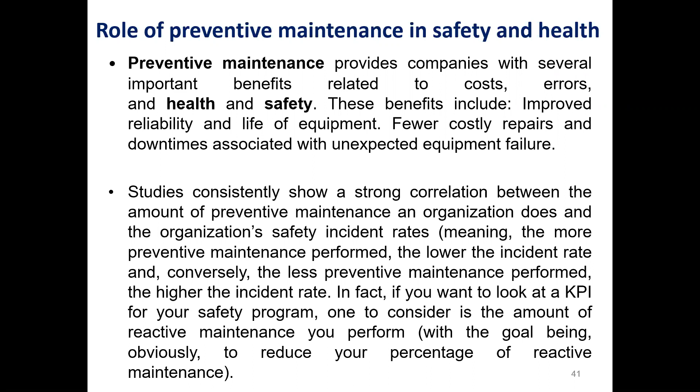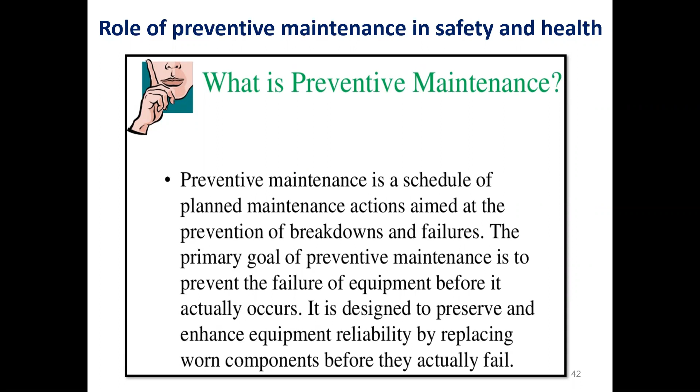What is preventive maintenance? We have already discussed all these things. What exactly the preventive maintenance is - to avoid the breakdown and failures. What the maintenance is that called is preventive maintenance. It is designed to preserve and enhance the equipment reliability by replacing worn components before they actually fail. So we have to observe these worn components and then we have to replace it.

These are the different parameters which are related to the preventive maintenance, that enhances the safety level. Then liability is more - the responsibility of the preventive maintenance or the central maintenance are there, and they have to observe all these components or the parts of that machinery. It is a reliable process because due to which we are going to avoid the major breakdown maintenances, and longevity. So these are the different parameters which are related to the preventive maintenance.

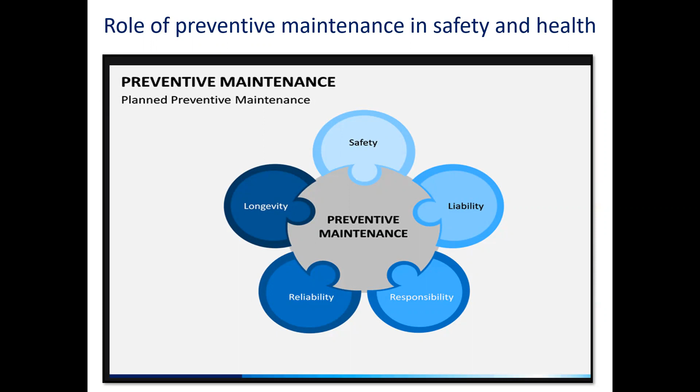So we have to plan the preventive maintenance in a smarter way. The types of maintenance are preventive and corrective - we have already discussed about this. With preventive maintenance, we can save our time. We can find the failure components, and these are condition based and prediction based, and they are going to reduce the risk. But in the corrective actions or corrective maintenance or breakdown maintenance, they are deferred, and this is nothing but the emergency situation.

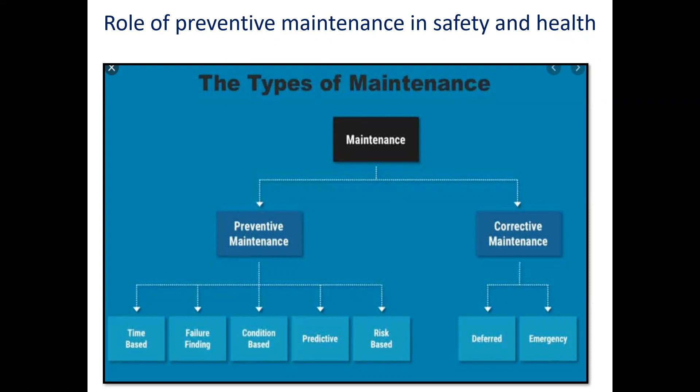Role of this preventive maintenance in safety and health. The reasons for the need of PM are increased automation, business loss due to production delays, production of higher quality product, just-in-time manufacturing, and need for a more organized and planned environment.

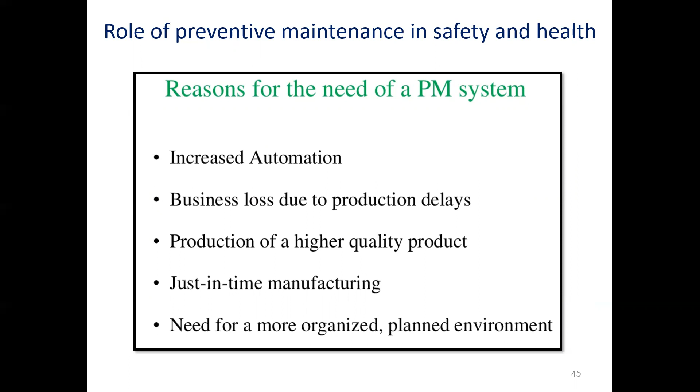So advantages, we already discussed these advantages. Just go through this: reduce production downtime resulting in fewer machine breakdowns, better conservation of assets, timely routine repairs circumvent fewer large scale repairs. If failure can't be prevented, periodic inspection should be held, to reduce the severity and cost of repairs, and identification of equipment with excessive maintenance cost. The cost of planned maintenance is always cheaper than emergency maintenance. It gives better quality product and improved safety and quality conditions.

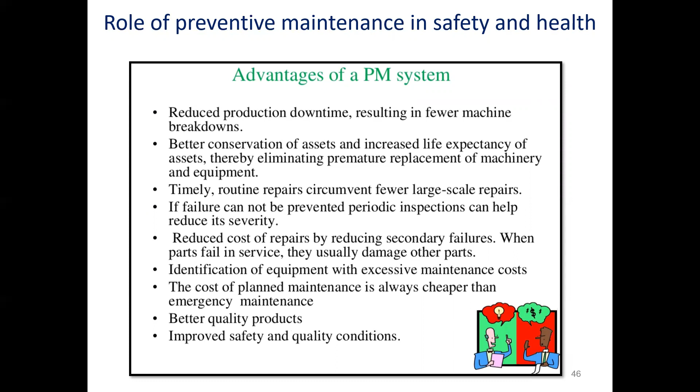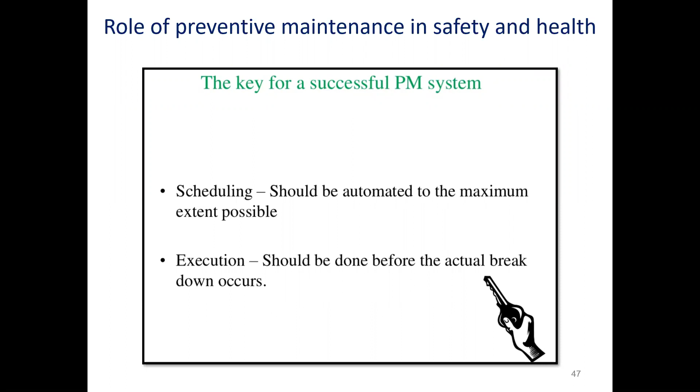The key of a successful PM system is scheduling and execution. Scheduling should be automated to the maximum extent possible, and execution should be done before the actual breakdown occurs. Because if it is done before the actual breakdown, only then is it called preventive maintenance. Otherwise, it becomes breakdown maintenance after failure.

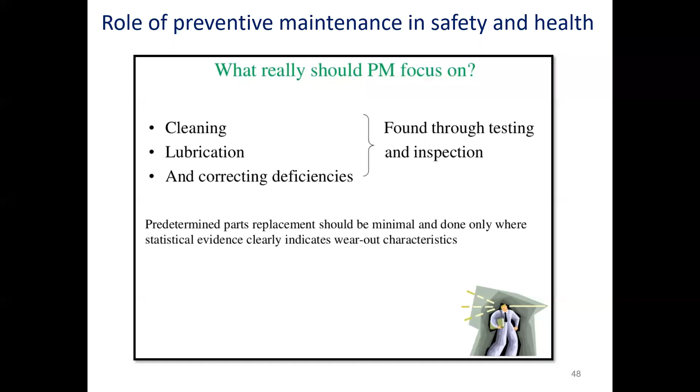So why are we focusing on all these things related to PM? That is for cleaning, production, lubrication, and correcting deficiencies. All these things are found through testing and inspection, then predetermined parts replacement should be minimal and done only where statistical evidence clearly indicates wear out characteristics.

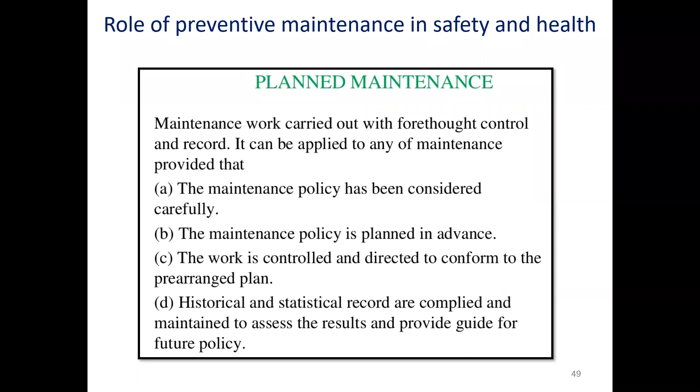So we have to plan this preventive maintenance in a better way, so the maintenance policy should be considered carefully and planned in advance. That should be work in control and directed to conform to the prearranged plan. Historical and statistical records are compiled and maintained accordingly.

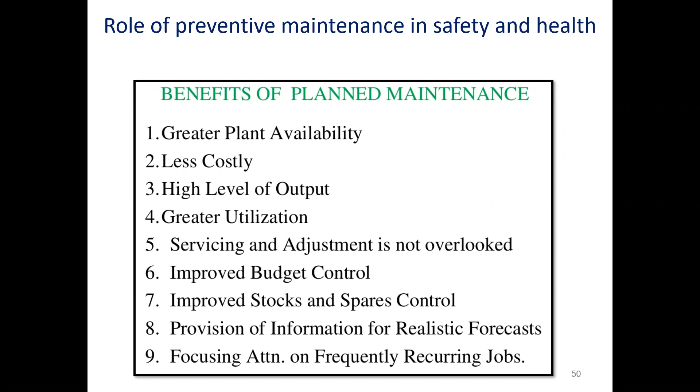So what are the benefits of planned maintenance? Greater plant availability, less costly, high level of output, greater utilization, servicing and adjustment not overlooked, improved budget control, improved stocks and spare control, provision of information for realistic forecast, and focusing attention on frequently recurring jobs. So these are the various benefits of planned maintenance.

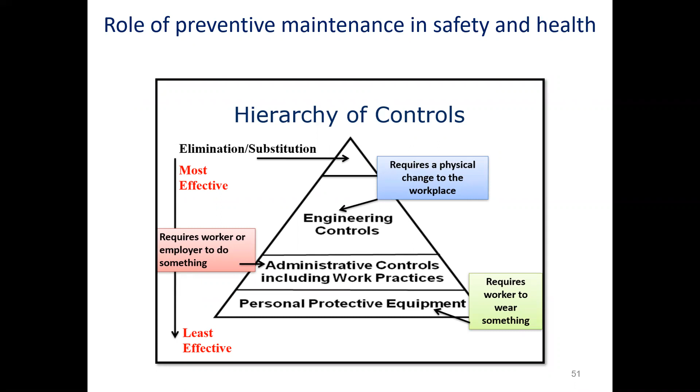This diagram shows you the hierarchy of control. Elimination or substitution gives the most effective process, then engineering control to reduce hazards, and administrative controls or personal protective equipment are the least effective. So we have to go for engineering control, and preventive maintenance is part of engineering control, which requires a physical change to the workplace. That is why we should prefer preventive maintenance over other types of maintenance.

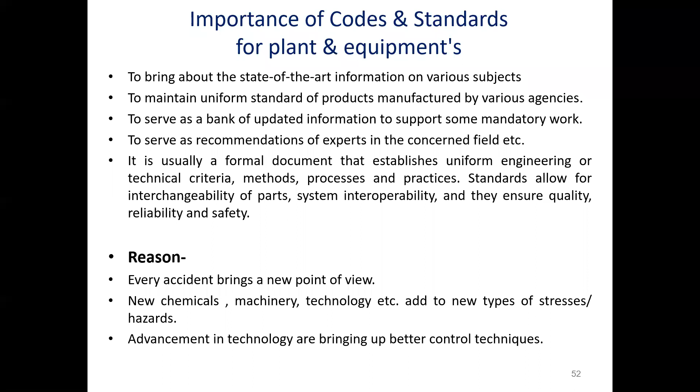The advancement in technology is bringing up better control techniques, but for that you have to go through the total or detailed training of this advanced technology.

Whatever standards are available, for example the Factory Act 1948 is a generalized act applicable for all industries in India. For the state of Maharashtra, you have to follow the Maharashtra Factory Rule 1963. Likewise, there are a number of rules and regulations we have to follow depending on the applicability of that rule to your organization. But when we say this act or rule is a mandatory condition, then we have to follow all of it.

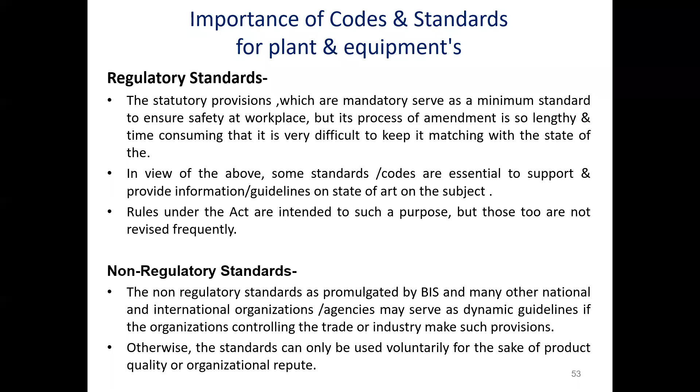Maybe next year also, the Occupational Safety Health 2020 Act may be there, which may be the replacement of the Factory Act. Up till now, from 1948, we have been following the Factory Act and its sections. But now, as per the latest requirements and conditions, with reference to different aspects of occupational safety and health, the government has prepared OSH 2020 guidelines, and they are going to execute it in the near future, maybe next year.